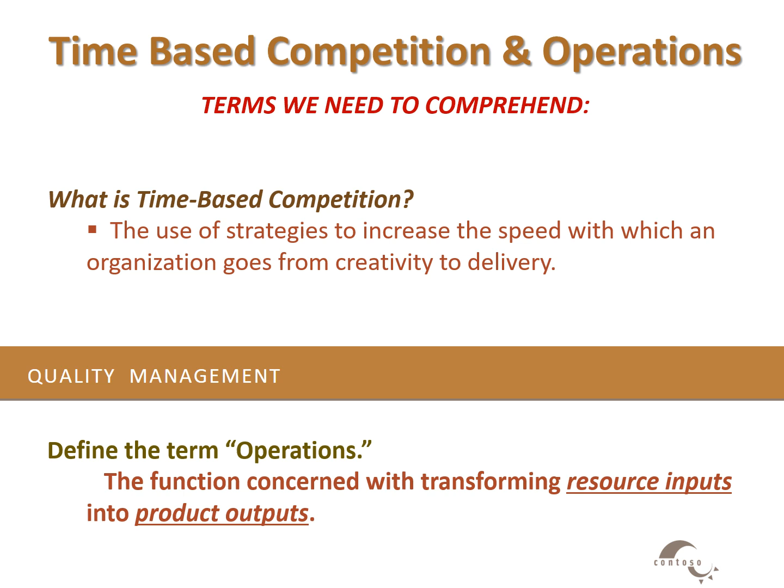Operations is the function concerned with transforming resource inputs or raw materials into product outputs.

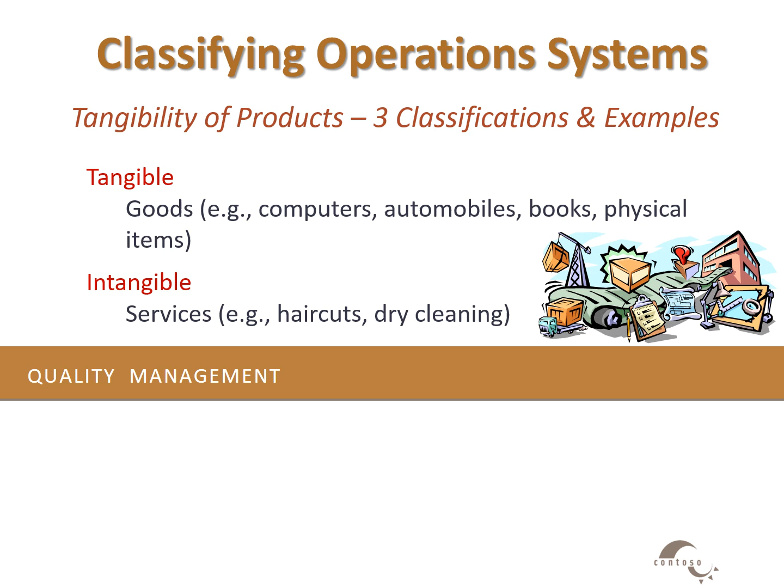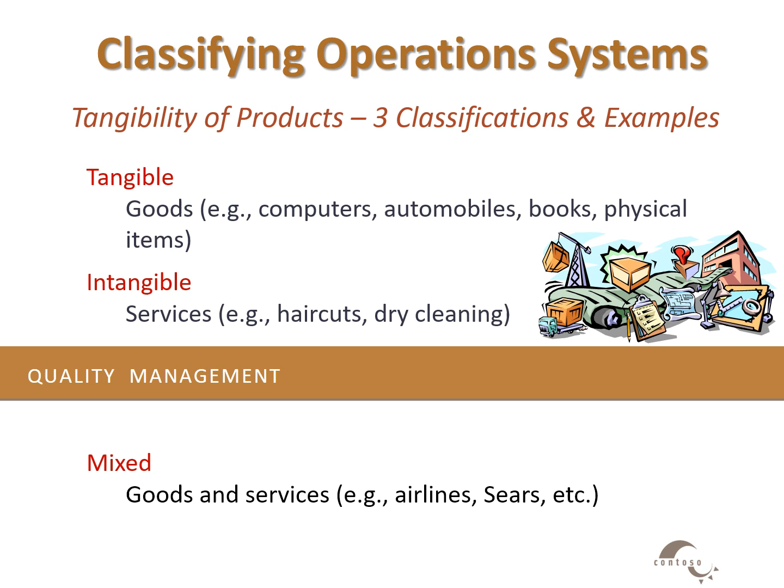There are three types of products. Tangible goods are computers, automobiles, books, and any physical item. Intangible are services, dry cleaning, haircuts, lawn care. Mixed are goods and services, like airlines and Sears. Sears, for instance, is a retail outlet, and they have companies make things for them under a certain brand that Sears only sold, for instance, Craftsman Tools.

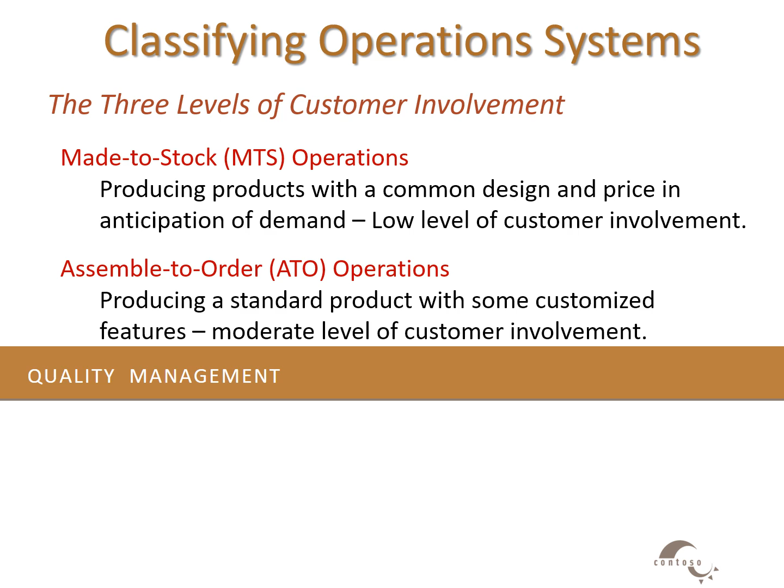Three levels of customer involvement. Made to stock: producing products with a common design and price in anticipation of customer demand, but with a low level of customer involvement. Assemble to order is producing a standard product with some customized features, or a moderate level of customer involvement. Made to order operations are producing products after you get an order from a customer, with a high level of customer involvement there.

So take a look at your company. What is your company's classification?

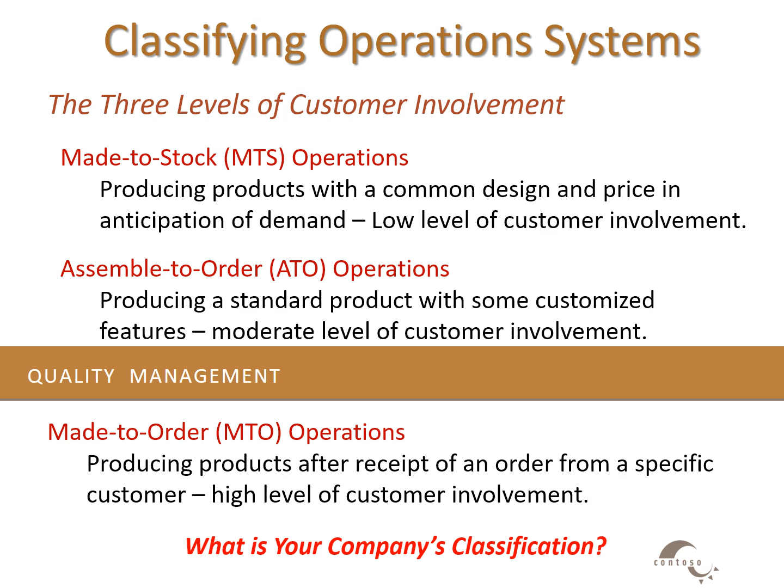Is the level of customer involvement highest with made to stock, assemble to order, or make to order operations? Which one and why? Make to order operations are carried out only after you've received an order from the customer. Therefore, it has the highest level of customer involvement.

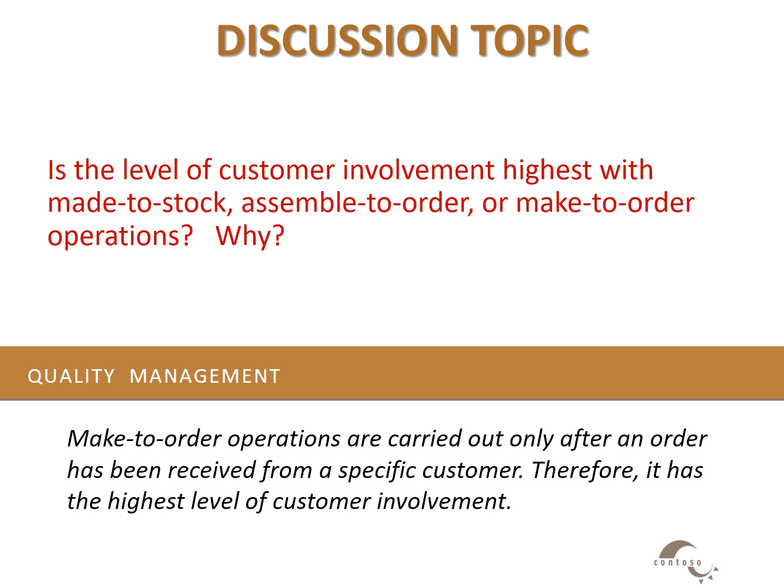Can a standard made to stock product, such as soda, also be made to order? If so, how? It's being done by changing repetitive process operation outputs to batch process operation outputs. For example, you can now have your name or initials put on M&M candy or on Nike sneakers.

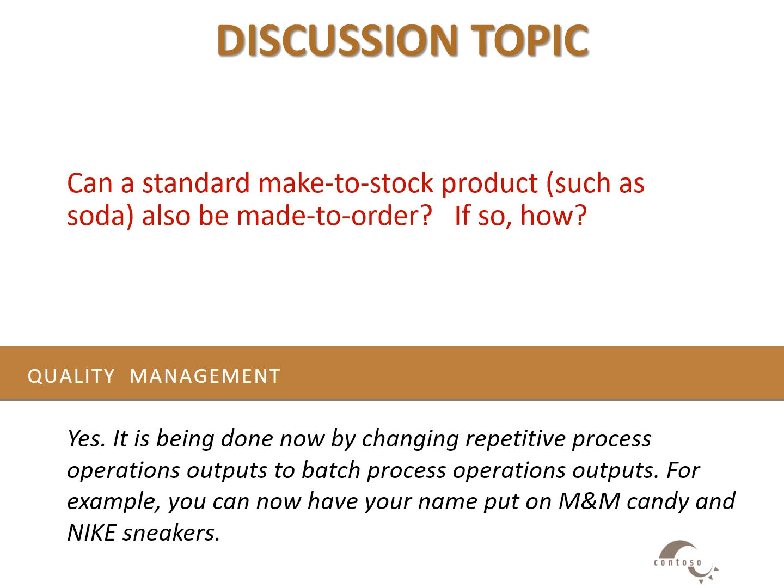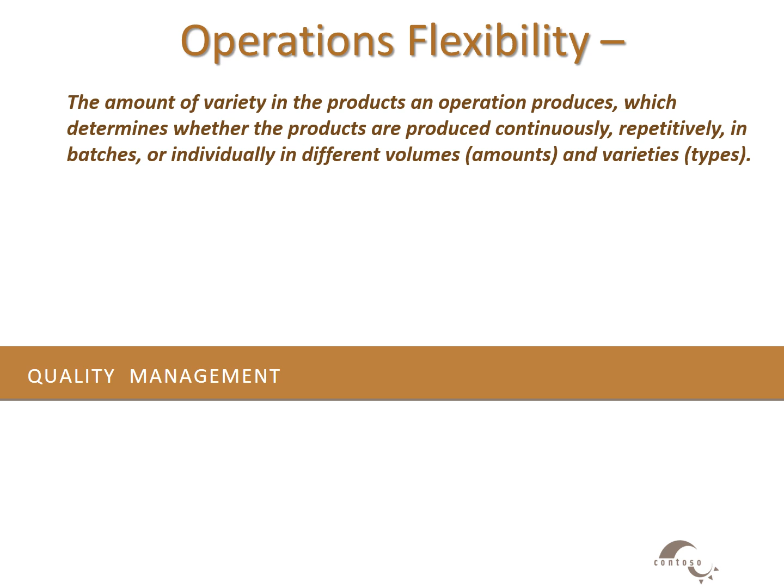Operations flexibility is the amount of variety in the products an operation produces, which in turn determines whether the products are produced continuously, repetitively, in batches, or individually in different volume amounts and varieties.

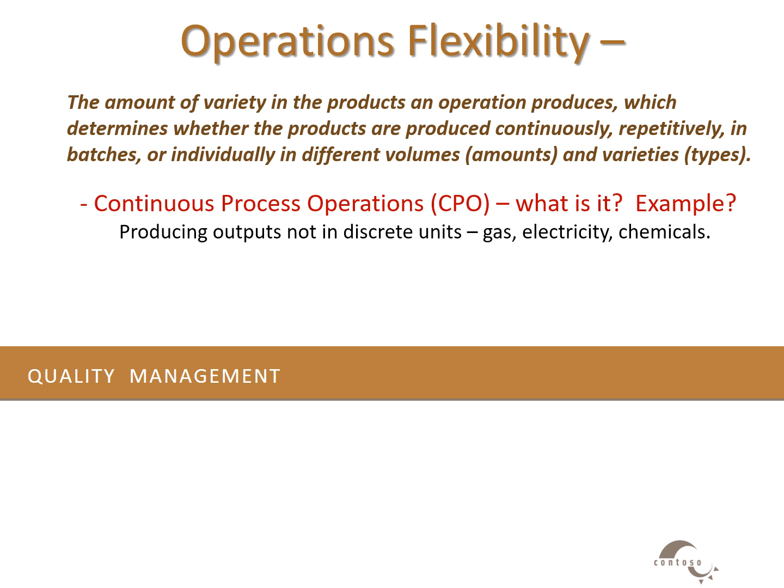Continuous process operations, what is it? Producing outputs not in discrete units. For instance, your natural gas, electricity, and chemicals are produced all in one great big continuous process.

Repetitive process operations: producing outputs in an assembly line structure, consumer goods, car wash, automotive assembly plant, using standardized tasks.

Batch process: producing various outputs with the same resources, same machines and people, but in a family of parts like car mirrors, screws, nails, and similar products that have different sizes, different lengths, and different characteristics.

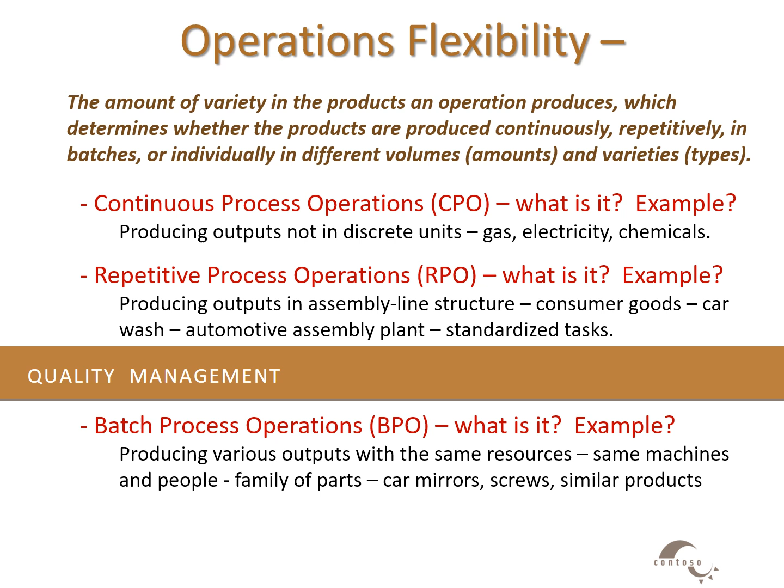Individual process operations are producing outputs to a customer specification. They're like a job shop. Retail and service organizations, they are made to order items.

Project process is producing outputs in low volume, higher variety goods or services. For instance, a consultant or construction. They are one-time only goods.

What is your company's operations method?

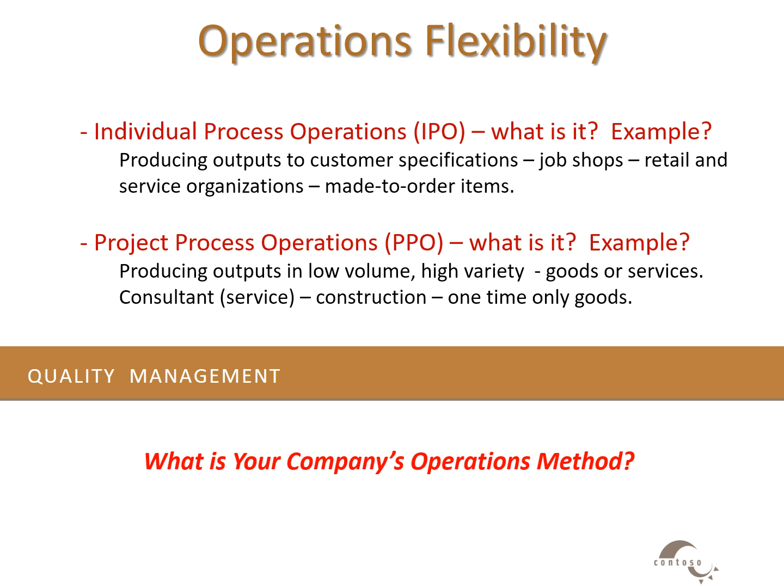Which type of process operation is the most flexible and the least flexible? Individual process operations are the most flexible, and continuous process operations, such as producing gas and electricity, are least flexible.

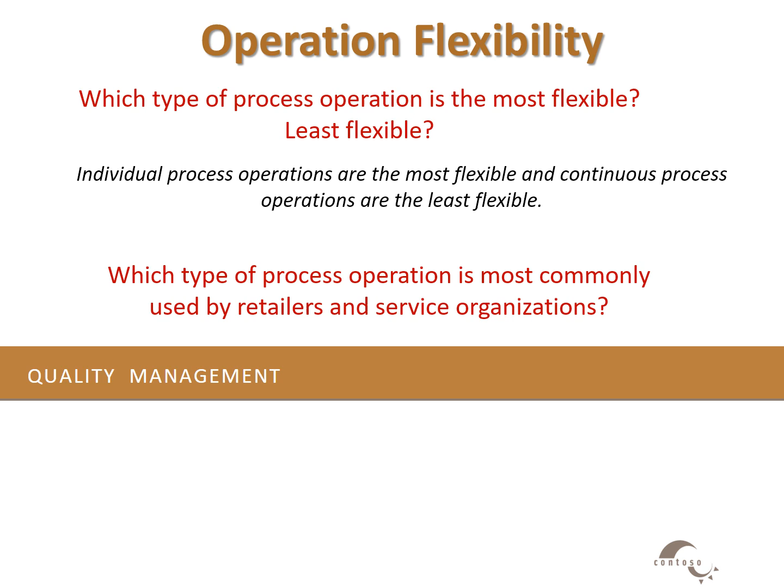Which type of process operation is most commonly used by both retailers and service organizations? The individual process operation.

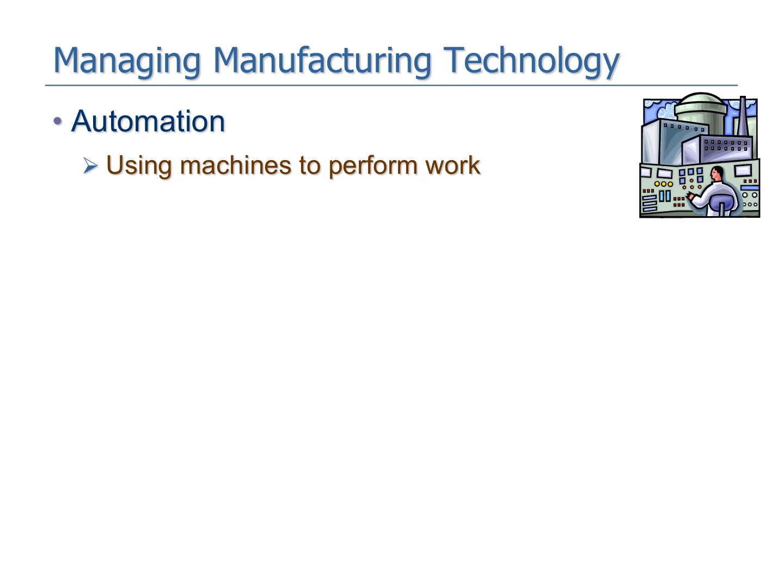All right, so managing manufacturing technology: automation, using machines to perform work, and you're seeing that more and more today. Computer-assisted manufacturing.

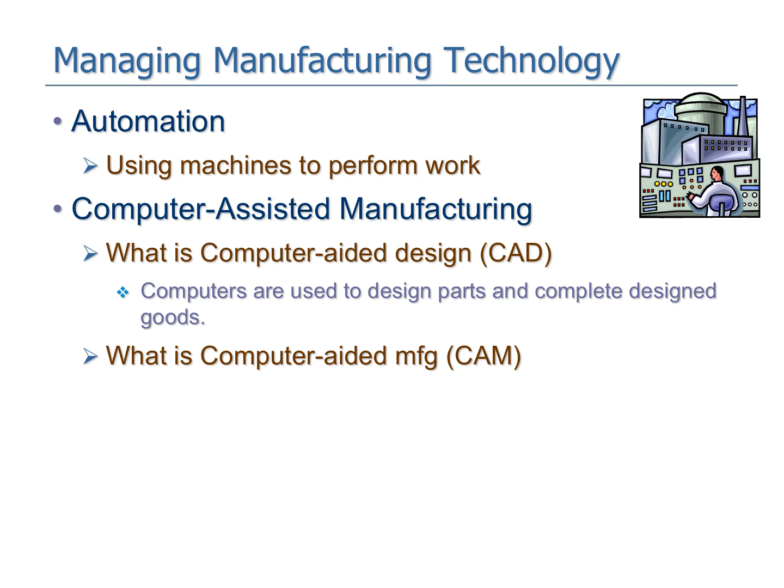First of all, there's CAD, or computer-aided design, a computer used to help design parts and complete design goods with particular specifications. Computer-aided manufacturing, or CAM, can be used to quickly produce a desired product, assisting other machines in the production. Computer-integrated manufacturing, however, links both CAD and CAM to adjust the machine placements and settings automatically. It's a management control system. So you have automation, computer-assisted manufacturing, CAD, CAM, and CIM, computer-integrated manufacturing.

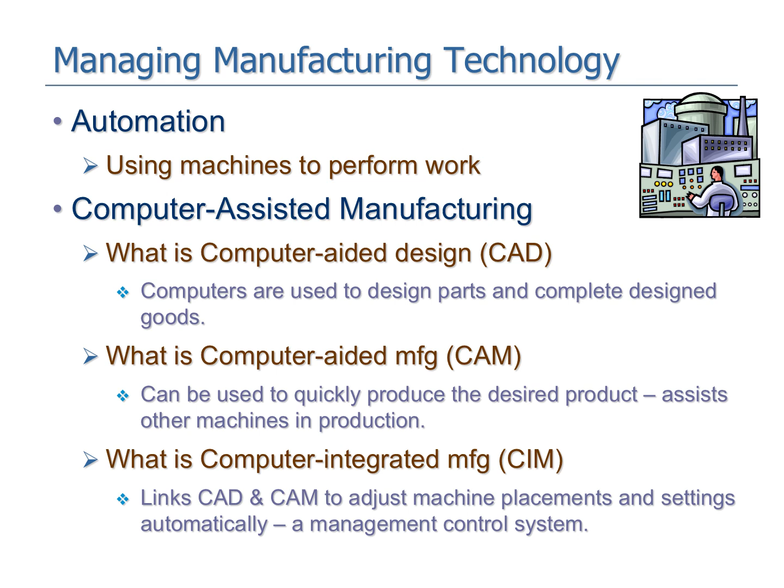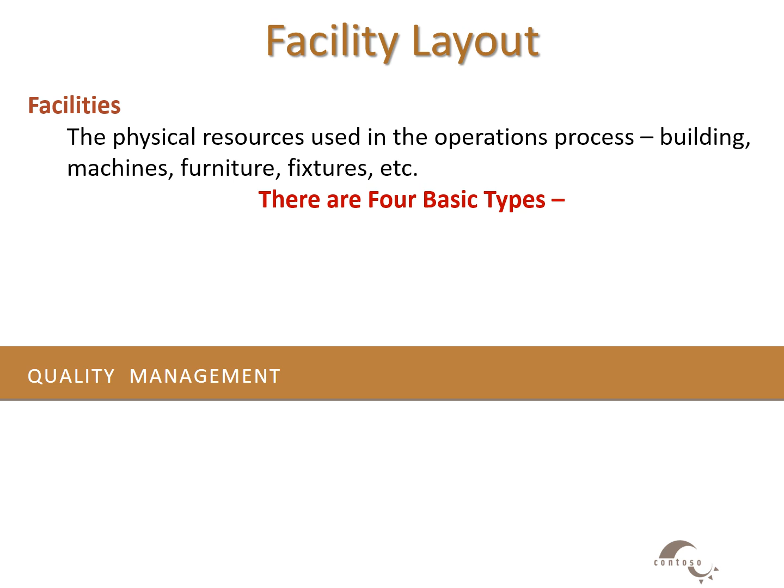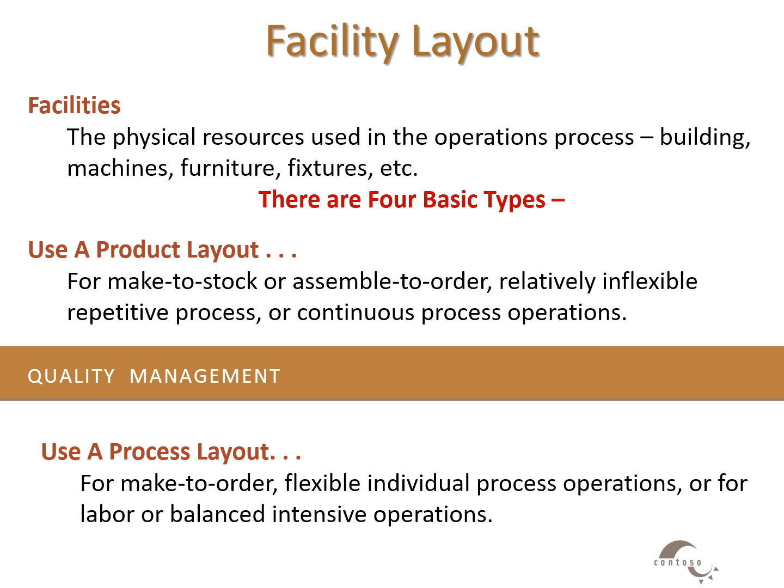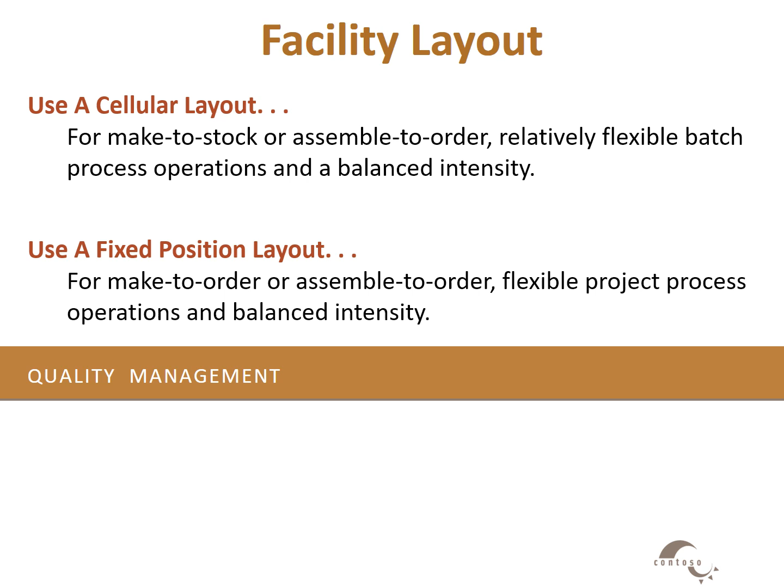A cellular layout is for make to stock or assemble to order, with relatively flexible batch operations and a balanced intensity. A fixed position layout is for make to order or assemble to order, with flexible project process operations, and also has a balanced intensity.

Which kind of facility does your company utilize?

Routing products through departments in batches facilitates utilization and efficiency, but it causes large pools of inventory and working capital to accumulate, and it forces non-value adding move, wait, and queue times to occur. If you study this diagram, you can see how things move. They may take product out to a particular station today, let it get processed, and then return it back.

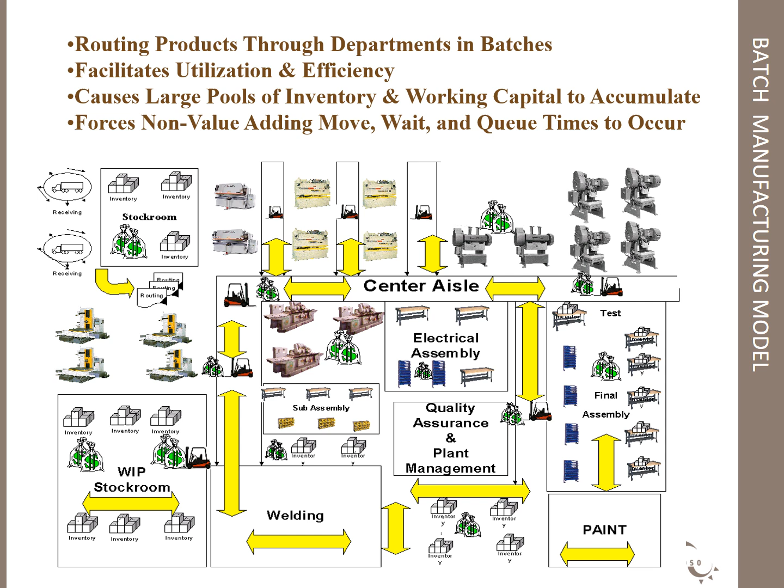To the work in process stockroom until it's time to move it to the next step. It's very cumbersome. Now we're going to take a look at a typical flow in an MRP batch manufacturing process: scheduling, routing, work order, going over to the staging area, producing a quantity, going over to the staging area again, and the work order is processed.

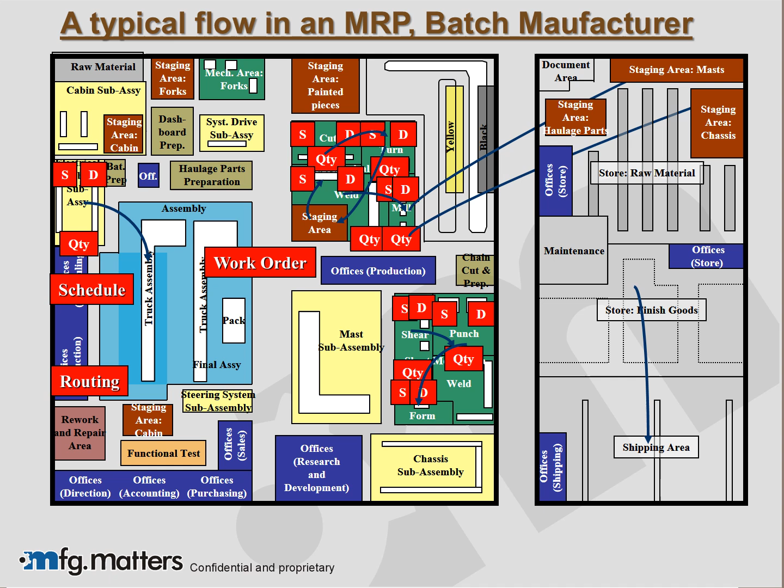If you watch this diagram, you can see that it flows all over the place. It's not very efficient. Honestly, in some manufacturing processes, they lose track of where inventory is because of this type of procedure.

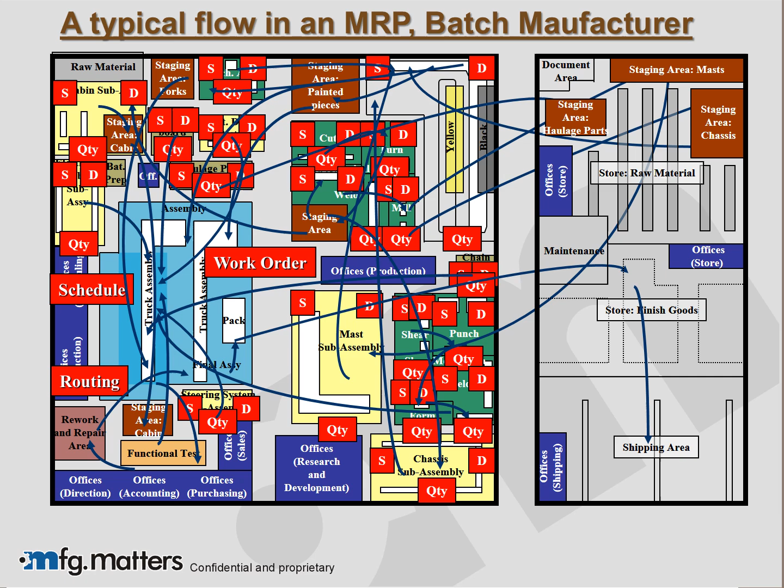When you look at this spaghetti chart, as we call it, it's very confusing and it's difficult to maintain a consistent knowledge of where everything is in the process.

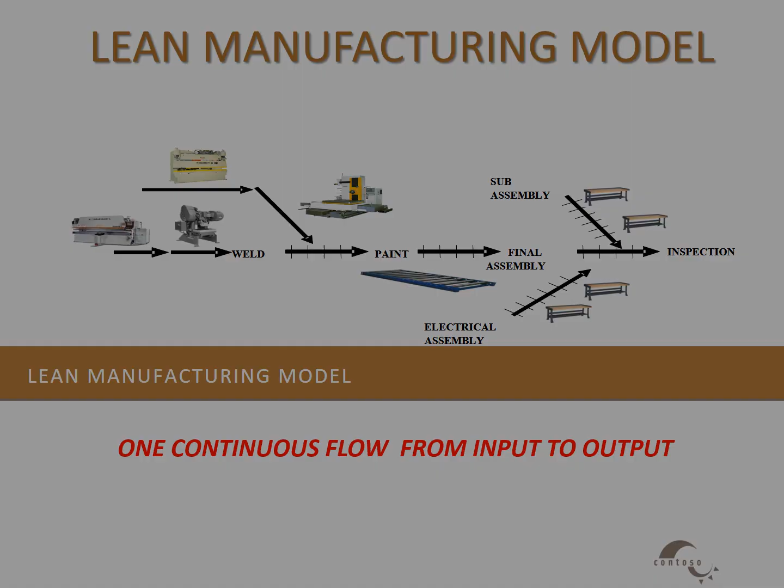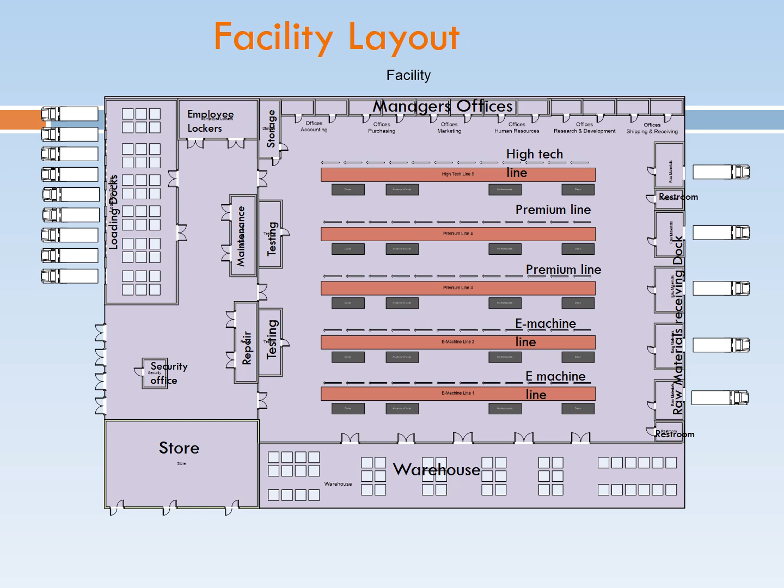In a facility layout, you'll notice a lot of loading docks, different lines, high-tech, premium line, e-machine, and a large warehouse to keep all this product. Again, cumbersome, but better than the last example.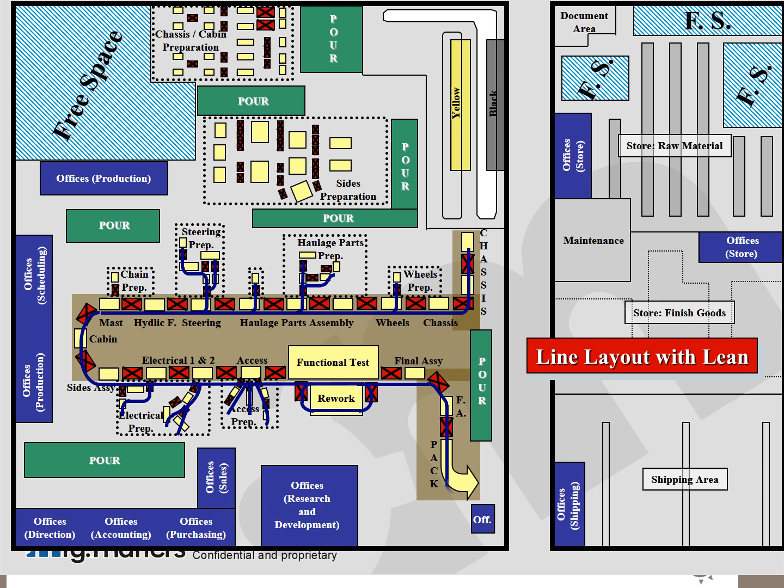In a line layout with lean, everything travels in one direction, so it moves along this path, with rework if necessary, and then out for quality inspection. To figure this process, we use a term called takt time.

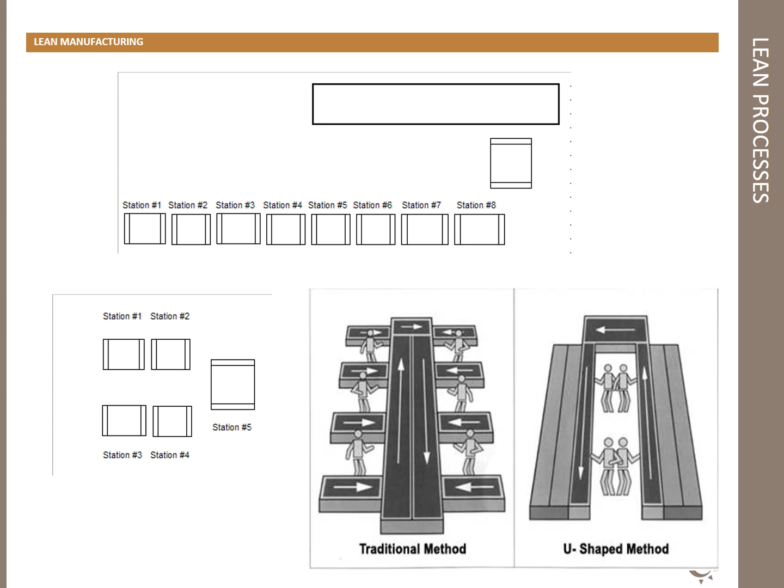Lean manufacturing uses a straight line or U-shaped line. The traditional method is this way, while the new U-shaped method has everything going in one direction. You can see different examples here.

Material flow, and why it's bad. Material flow to the right is a better operation because operators can trade elements of work. A bad operation is one where the operators are completely separated from each other, while a better operation is where the two workers can work closer together to help each other out.

A straight line is difficult to balance, but the U line helps you balance it more efficiently. So lean emphasizes the U lines.

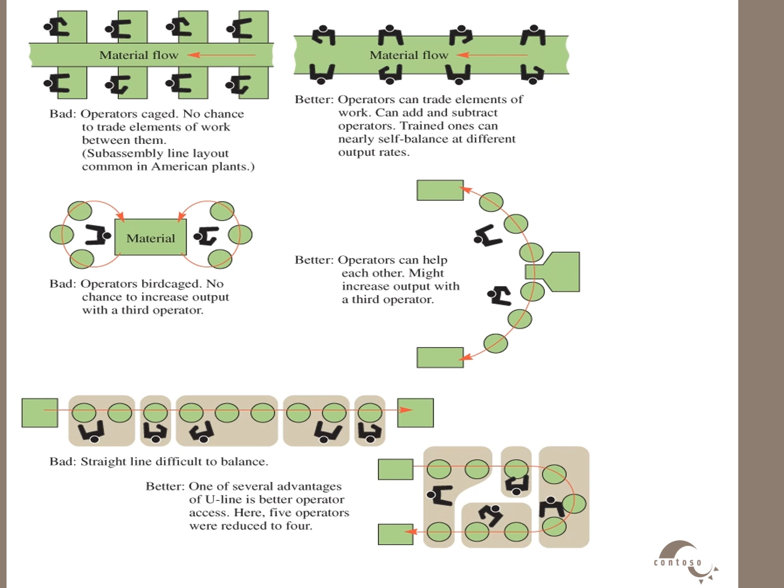Now let's take a look at capacity planning. What is that? It's the amount of products an organization can produce within a given period of time: how much they can produce daily, weekly, monthly, or annually, using a set amount of resources, that is, machines, people, raw materials, etc.

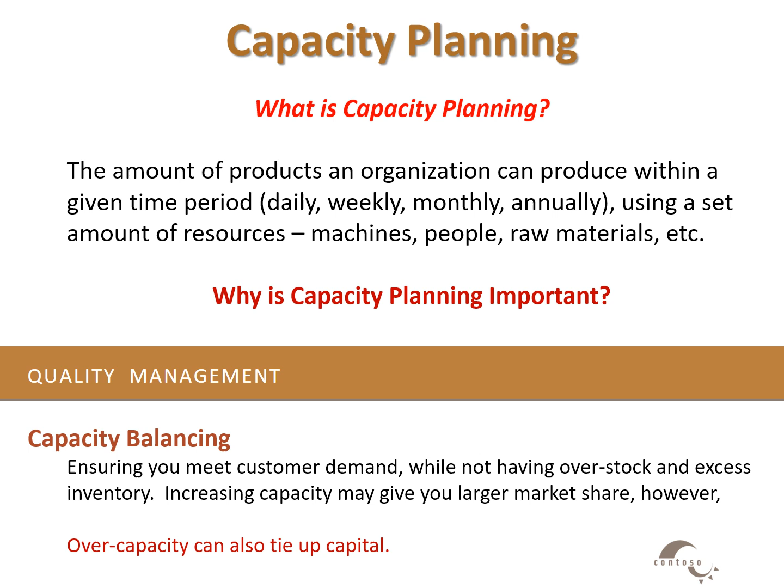Why is this important? It ensures you meet your customer demand while not having overstock and excess inventory. Increasing capacity may give you larger market share; however, overcapacity will tie up a lot of your capital.

What's the purpose of doing scheduling? It's the process of listing activities that must be performed to accomplish an objective. The activities are listed in sequence along with the time needed to complete each one of those tasks.

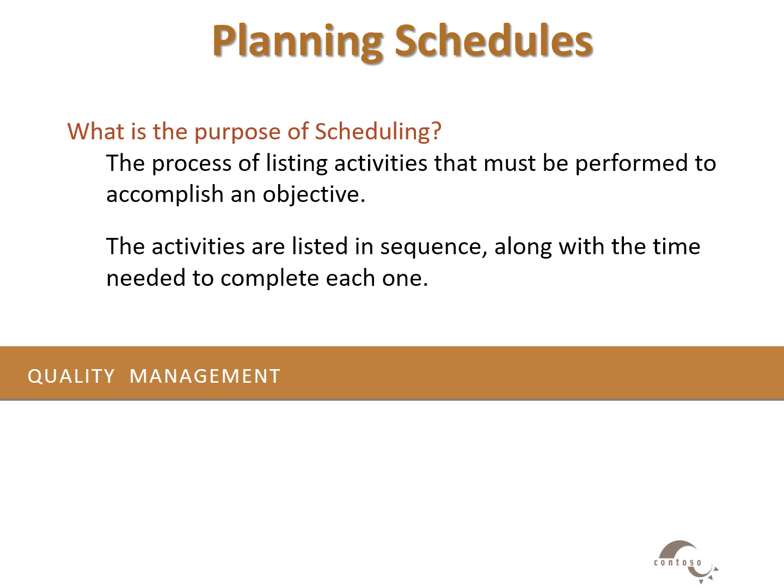Routing is the path and sequence of the transformation of a product from raw materials down the line into an output.

Priority scheduling is a continuous evaluation and reordering of the sequence in which products will be produced. There are different methods: first come first served, producing the earliest due date, or producing by the shortest operating time.